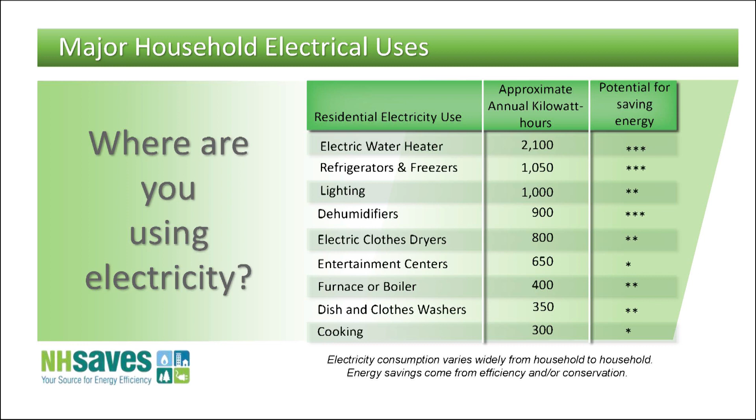We'll talk about a couple other things here, giving you an overview of major uses of electricity. We've cut down the number for lighting because so many people are using LED light bulbs now compared to incandescent, and they're even more energy saving than compact fluorescent, the squiggly ones. But if you've got those, continue to use them, and once they wear out, save them for a household hazardous waste day, which I assume you have in Peterborough and other towns. We can also bring our compact fluorescents to the recycling center.

If you're wondering how do I know how much these different devices are using - refrigerators are another good example that use a lot of electricity, but some refrigerators use a lot less than others. Do you folks know if the library here has watt meters available to check out? Don't know. Be a good prep activity just to find out.

Anything that plugs into a regular outlet - there's different brands out there. They're like $25 or $30. A number of years ago, like 15 years ago, every public library in the state got one or two of these, and a lot of libraries still have them. You check them out like a book, go around to different devices, plug it in, maybe leave it in for a day or so, and find out over the course of a day how much that refrigerator is using, for example, then do a little math to get that equivalent in kilowatt hours for the whole year.

That's what you're billed in, a kilowatt hour - that's 1,000 watts of electricity on for an hour. So if you had a light bulb and it's not on, it's not using any electricity. There's a time aspect with electrical consumption. 1,000 watts for an hour is a kilowatt hour.

Around here it's about 20 cents if you include all the costs. You folks have community power now, right? So you have to include the cost of keeping the lines up as well as the supply cost. But if you add that all together, it's about 20 to 25 cents now altogether. Anybody know, for a kilowatt hour? Still a pretty good deal, but our rates are some of the highest in the country. Probably if you think about all the effort that's gone into these storms and restoring power, there's just a lot of costs right there, just keeping these lines functional around here.

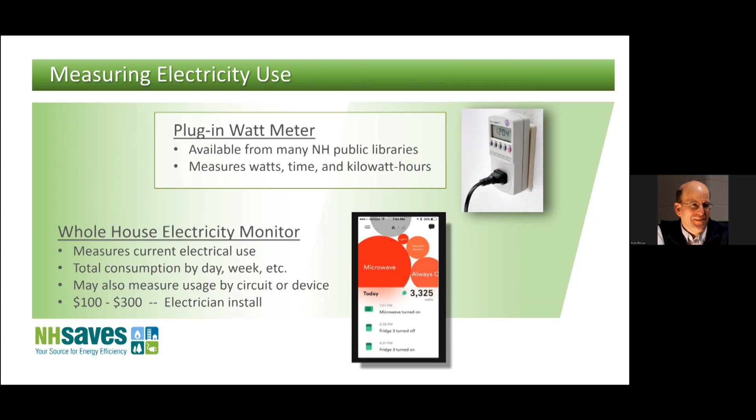If you're really interested in monitoring electricity throughout your whole house, you could invest in a whole house energy monitor. I've got one with my house, and it's telling me right now I'm using about 170 watts, which isn't too bad. But it also shows the amount of consumption over a period of time, and there's probably a microwave or stove that got turned on - you see the little spikes there for a short period of time.

What's pretty interesting, this is a Sense brand - even though it's monitoring just all the electricity being used by the house, it uses artificial intelligence to figure out the electrical signatures of specific big electricity consumers. So it tells me exactly how much electricity I'm using when I'm charging my car, I have a plug-in hybrid, or my boiler circulator pump, or the clothes washer. It's pretty neat - it certainly doesn't capture everything, but it's got a pretty decent list of devices that I can know specifically when they're on, when they're off, how much electricity they're using, by the month, year, or day. There are other devices like that as well that are pretty nifty.

Are there any AIs that just turn everything off when it needs to? Well, there's certainly the whole smart home technology thing, and there are some that do that.

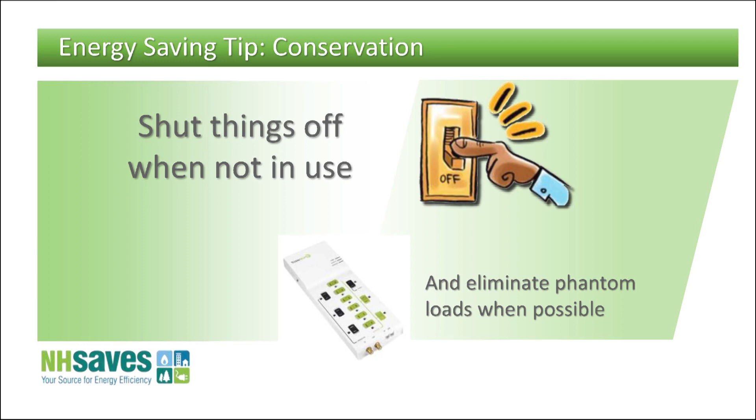There are even things like GFCI outlets that have a little light. They're using electricity, but it's not like you want to turn off that circuit breaker for it. So it's a little bit of a challenge, but I think that's kind of getting the inner energy geek coming out of you, going around the house and saying, alright, where is all this electricity getting used? Certainly that plug-in watt meter is a good way to start.

Next slide. Just a question: if you have light bulbs plugged in, does it use a phantom load? For the most part, if it's just a standard electric light, whether incandescent, LED, or fluorescent, it's not really going to be using any electricity. If it's a smart light, it may be using electricity. And there are some systems with ballasts and other more commercial type systems that might be using some electricity.

Good question. So we're just kind of talking about lighting. That light bulb we passed around, if you left it on 24 hours a day for a whole month, it would cost $1.34. That's at 20 cents a kilowatt hour, your local rate. So it's not that expensive - 21 cents, not 19, thank you.

I remember doing button-ups where it's like, yeah, one of these days we're going to have LED lights, it's going to be great. Well, we're already there. What's happened is these LED lights have become very inexpensive, but they're not quite as long lasting as the ones that came out 5-8 years ago, which were more expensive but a little longer lasting. Those used to be very heavy, but these ones now just look like a regular old incandescent light bulb.

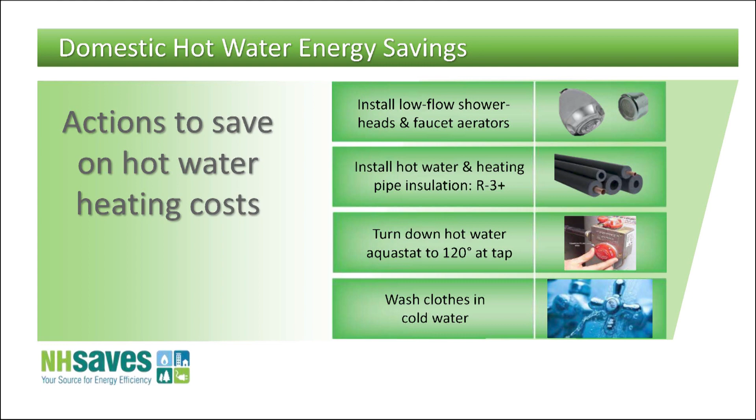Question: is there any downside to not washing clothes in hot water? Well, some people say that. I think for the most part pretty much all the detergents now are designed to work in cold water pretty well. It could be for things like bright whites—you might be able to get things a little whiter—but I think for the most part clothes washers and detergents are designed for it. And some clothes washers have a setting that's not absolute cold but sort of cold, so they mix in a little hot water, so it's not like 40-degree water that your clothes are getting washed in.

Already mentioned dehumidifiers, and that's where getting that setting so it's not on too much but on enough matters. I noticed in a lot of basements there's big differences in dryness, but in our basement, which is relatively dry, we have a dehumidifier. I oftentimes wait until June or thereabouts before I turn it on, and then maybe sometime in September, early October, would be when I'd turn it off.

Right now, this might not make a lot of sense for a lot of you, but the dew point, which is a better measure of humidity in the air—I just checked the other day, it was 29 degrees for the dew point, in other words this air is quite dry, and that's the key thing. Last summer, we didn't get below like 60 degrees for a dew point for months. We just remember that rainy, wet summer, and that's where a dehumidifier comes in handy to make sure you don't get to mold growth conditions and things like that in the basement.

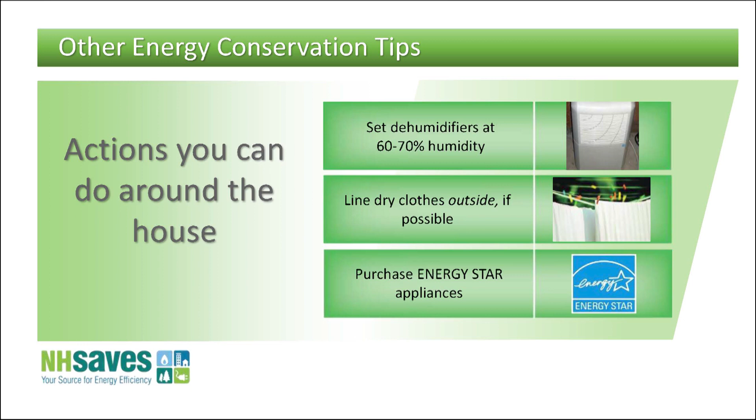There's essentially heat pump style clothes dryers. What's interesting about those is that you can actually install them in a place where you don't have to vent the air to the outside. So they give you a lot more flexibility, but they're also a lot more expensive. But they're also much more efficient than your standard electric clothes dryer.

Refrigerators, it's a good one. If you've got an old refrigerator, you certainly want to look up its rating, not only whether it's Energy Star, but how many kilowatt hours a year it's rated for. And then there's a nice feature with the program New Hampshire Saves has, where if you have a second refrigerator or freezer that's still functional but you don't really need any longer, they'll haul it away and give you $75. It's like my electric company giving me $75 to use less electricity.

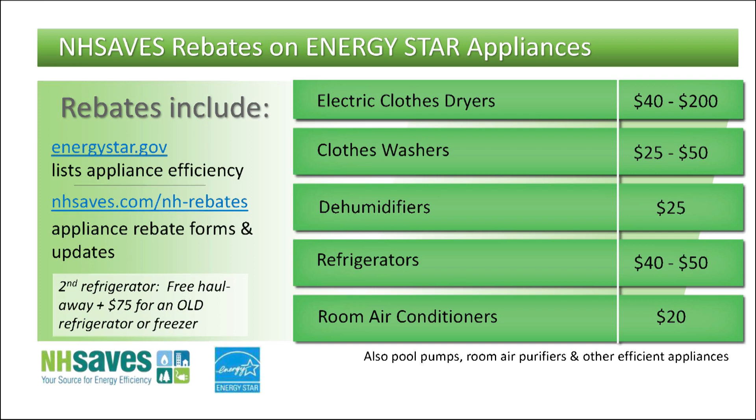All right, next slide.

So kind of moving away from electricity savings and domestic hot water, and more towards keeping your home warm in the winter and cool in the summer. This is kind of a weird time of year to be talking about all that, but we do live in a climate where really our biggest energy expense for our homes is heating them. So even this time of year, it's good to be thinking about that.

And I think if you click it again, something else might show up. So this isn't about freezing in the dark, although I applaud people who keep their thermostats low and things like that.

Next slide. Some quick tips along these lines: turning down the thermostat, maybe using a smart thermostat, which actually has occupancy sensors so it can help turn down that thermostat automatically for you if that works, or a programmable thermostat.

This definitely isn't the time of year to be talking about this, but in the fall, say October and November, if you have window air conditioners in your standard windows, it's very difficult to get that window with the air conditioner fully sealed. So really the best way, even though it's a pain, is to take the air conditioner out and fully close the window.

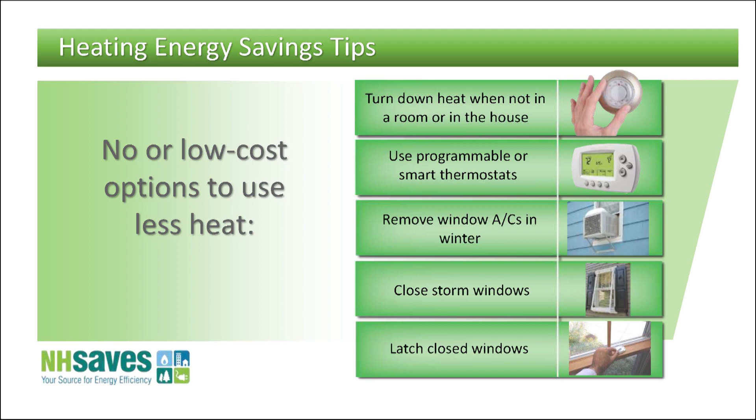So just kind of going through the house in November and checking all those things makes a lot of sense.

Okay, and then we go into a little bit more depth with this in the full button-up slide, and a lot more depth with building science principles and building analysts, but a little bit about conductive and convective heat loss. The idea is that in the wintertime, you've got a warm house and it's cold outside, and you want to keep that warmth in. So I'm going to talk about how we keep that warmth in, and what mechanisms are trying to have that heat escape. It's not all about the arrows - heat's not just escaping out of the top of the house, it's really escaping all the way around.

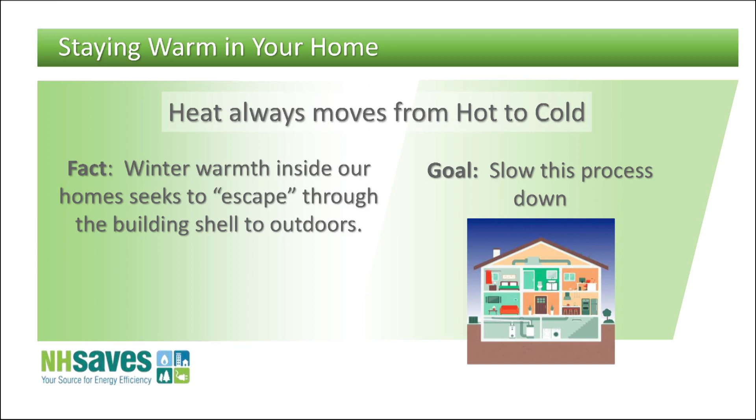Okay, now next slide. So just real briefly, conduction is one mechanism for heat transfer, or heat loss in the wintertime, and that's through materials. Then conduction - that's the one we tend to understand pretty well because you counteract that with insulation. Actually, the one we don't understand very well is the convection part, and that's basically heat loss from air leakage. There are a number of houses around here, I'd be safe to say, that are losing more heat from air leakage than they're losing from lack of insulation. People say, oh, I've got my house all insulated, I'm all good now. My next question would be, so you've done a blower door test to measure air leakage? And they're like, blower door test, what's that? It's like, okay, well maybe you should go to a button-up presentation.

And then radiation - it's not 3 Mile Island or Seabrook. It's more basically, today is a good example - it's the sun radiating heat. We appreciate it on a day like today. It was probably frosty here this morning, or 29-degree dew point, maybe not even frosty, but below freezing. This is an important one in the summertime - if you can reduce the sun's heat from hitting the house, coming in windows, or even just hitting materials on the house, you'll help keep that house cooler. So it's like shade trees or curtains or things like that. But I'm not going to talk as much about that, more on conduction and convection. So next slide.

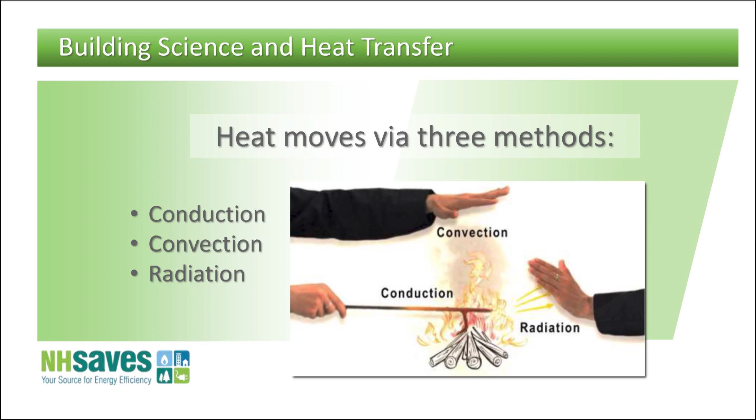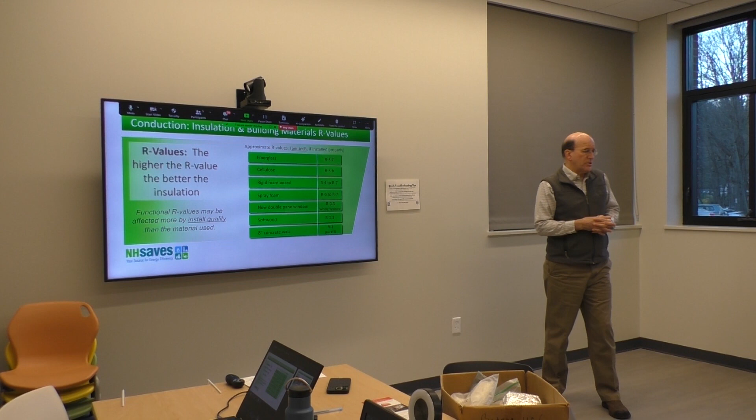So on the conduction side of things, we use different types of materials as insulating materials. This is a foam board, extruded polystyrene, and it has an R value, which is the measure of insulation effectiveness, an R value of 5 per inch. And then there's other materials.

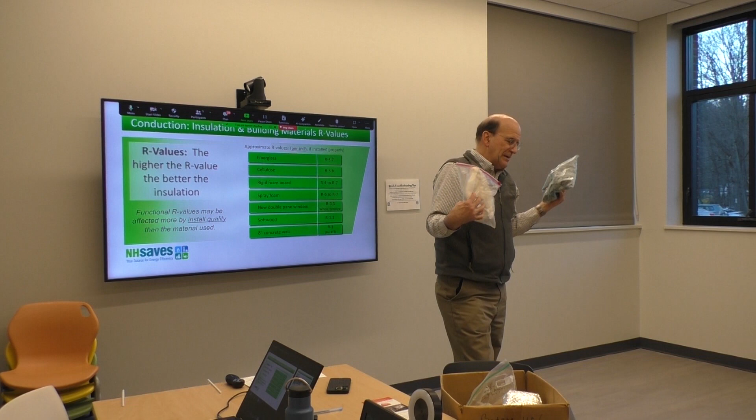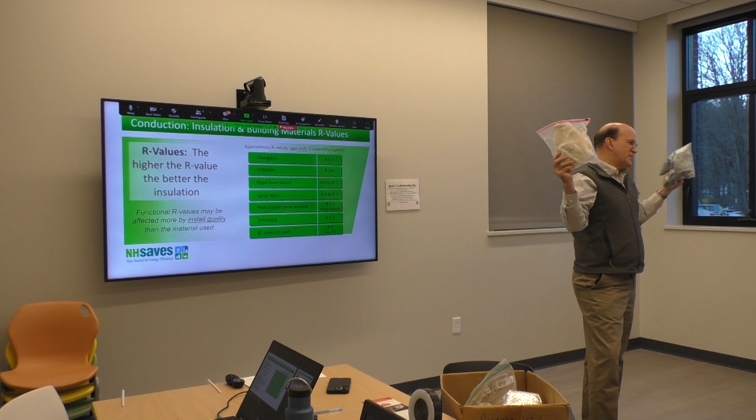This was in that NPR thing where I talked about little air pockets - it was like a 2-second thing. But it is an important concept, and that is that there are materials like cellulose, which is basically ground up newsprint, and materials like fiberglass, which is just this mat of spun fibers, where it's not the materials themselves that are insulating, it's the little air pockets that they trap that is insulating. Even with that foam board, it's the little bubbles that are trapped.

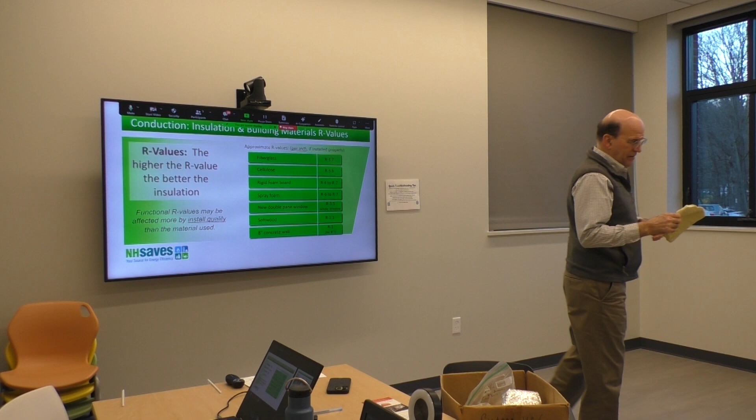And then there are some materials, like a high density closed cell spray foam, where the bubbles actually are gases that are more insulating than air, so they have a higher R value than some other types of materials. I'm not going to go through all these things, but it gives you an idea of the different R values per inch for most of these.

But I do want to point out a couple here - what kind of windows do we have here? Double pane? Double pane, probably pretty high performance windows. And then we've got a pretty thick wall. Anybody know what kind of insulation's in the wall? Probably this wall is R20 or something like that. This window right next to this wall is about R3, R3.5. So windows are great in terms of daylight - they can bring a little bit of solar heat gain in the wintertime, but they're thermal weak links when it comes to the building assembly.

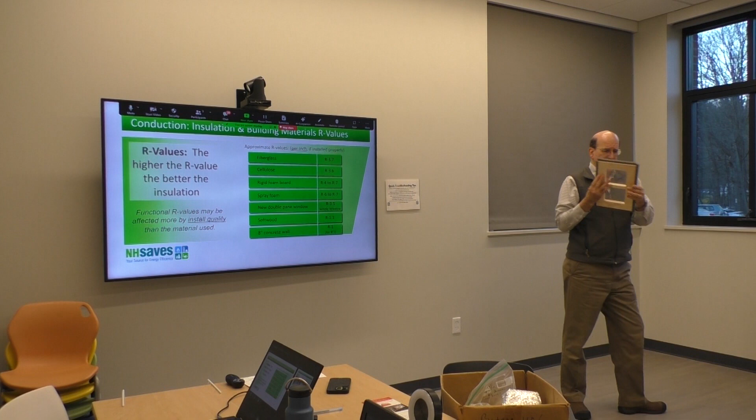Thermal pane is a little bit of a misnomer for insulating windows, but that's a good window. A single pane window is about R1, which loses a lot of heat. That's one of the things the window dressers program addresses, because now you've got two layers trapping some air in between, adding thickness as another layer, bringing you to roughly about R2 or R3 added to that window.

So even if you have a new house with these new thermal pane windows and think you really don't need window dressers, you're still going to get quite a bit of benefit with something like this.

Now notice this one, and this is the same for bricks or stone. If you have an old stone foundation and think, well, I don't heat the basement, it's not a big deal, you're still losing a lot of heat even in that 50-degree basement, because 8 inches of concrete or stone is a little over R1. So it's very low in terms of R value. It has a lot of thermal mass, M-A-S-S, which tends to mask the fact that it's actually very conductive in terms of heat.

One of the most effective things that can be done around here in terms of insulation is actually insulating basement walls, because your basement is thermally connected to the rest of the house even if you don't live down there or officially heat it. It also helps with things like frozen pipes.

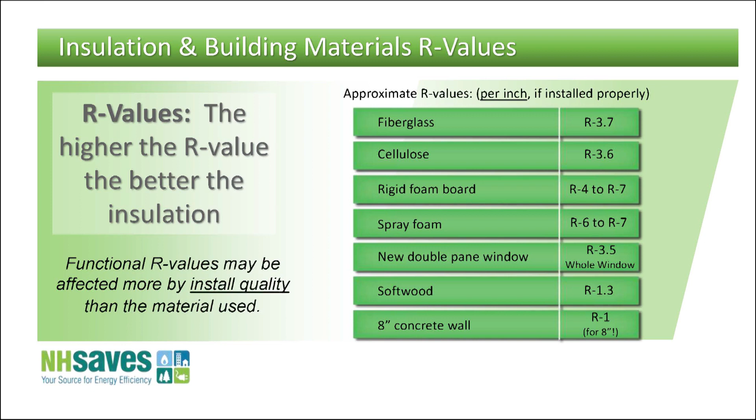We did that—that was one of the first things my husband did. Did it make a difference? Yeah, absolutely.

All right, next slide. Any other questions about insulating materials? I've got others that I can pass around, but those are some of the major ones.

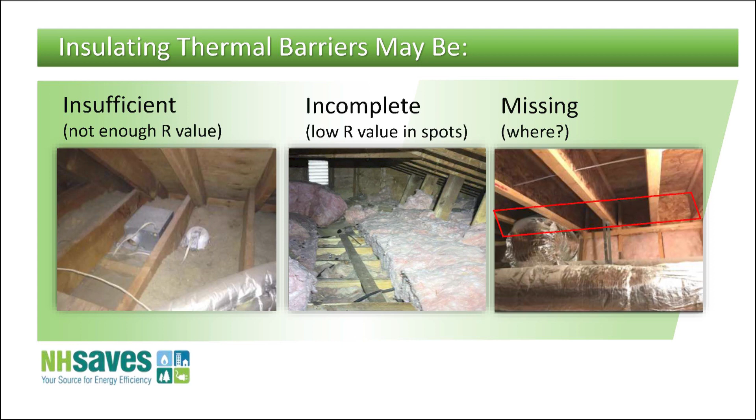Anybody notice what's going on here? Yeah, they didn't get it done. This is a vertical wall, and they did put fiberglass insulation in this portion of the wall, but they just missed this other portion. That's more common than you might think.

So can I get a volunteer to come up? I've got something that's not tricky. I'm just going to put one hand on one square, another hand on another square—you're close by—and just tell me which one is colder and which one is warmer, if there's any difference. We'll pass these around.

They feel the same? This one feels a little colder. Bob, what do you think? This one's colder. So we've got these two discs, they look kind of similar, but when you pick them up you notice there's some difference.

Basically, you want your house to be like this and not like this, because they're essentially the same temperature, but one is much more thermally conductive than the other. One is made out of aluminum, and one is essentially like a foam board type material. So even though they're the same temperature, when you put your hand on the aluminum one, it's conducting heat from your fingers. It's that same concept as walking on a tile floor as opposed to a carpeted floor—chances are that carpeted floor and that tile floor are about the same floor temperature, it's just more heat conducting out of your bare feet on the tile floor.

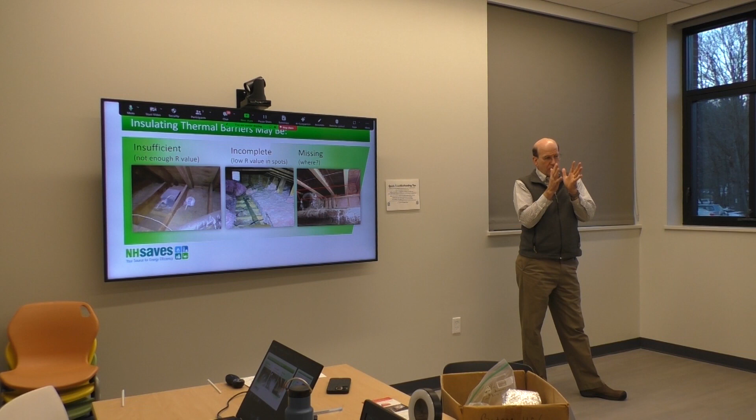It's true that manufactured homes and mobile homes are going to have thinner walls, but they also have bellies with ductwork underneath the home. The weatherization assistance program does a lot of work with mobile homes, and it's amazing how much better they can get mobile homes to be in terms of keeping that heat in.

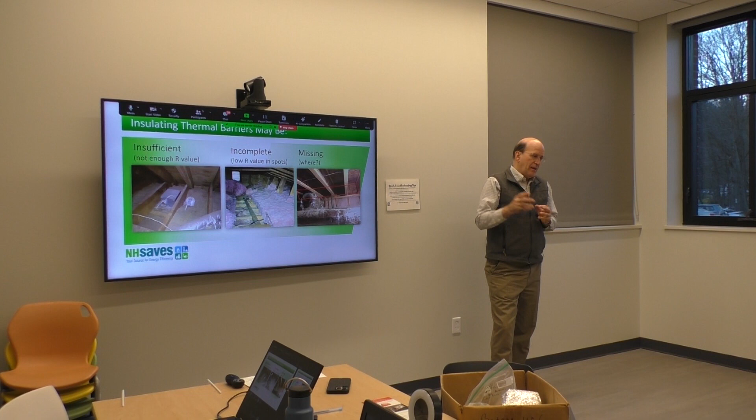They can use spray foam, but they don't use it a whole lot. They typically use blown in fiberglass because it's lighter weight than cellulose, and they fix the belly, and oftentimes add more insulation on top. It's a little bit harder for them to get more insulation in the walls themselves, but they can make a huge difference in a lot of them.

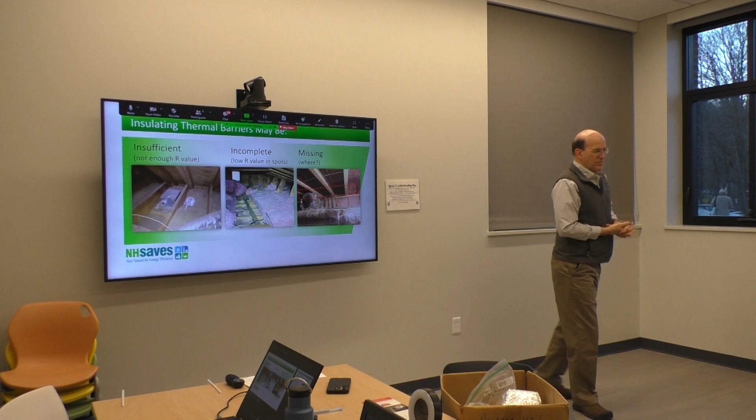All right, how about next slide?

We were just talking about conduction—basically think of it like squares of heat going through materials. Now we're talking about heat associated with air. The thing that a lot of people don't realize is that there's a lot of warm air leaking out of a house in a typical house in the wintertime.

If you can do a little bit of sleuthing—this is the kind of thing where volunteers could help a little bit—but without a blower door to measure that air leakage, it's really hard to tell how much of that warm air is leaking out in the wintertime. As a colleague says, that's expensive air. That's air you've paid dearly to heat, and it's just leaking out of the house.

We're basically talking about pressure differences, not about covering a surface like insulation. Sometimes I have a slide with an inflatable raft that's all deflated, and it's like: I'll sell you that inflatable raft for really cheap, $20. It's only got leaks in about 5% of its surface area. You want to buy that?

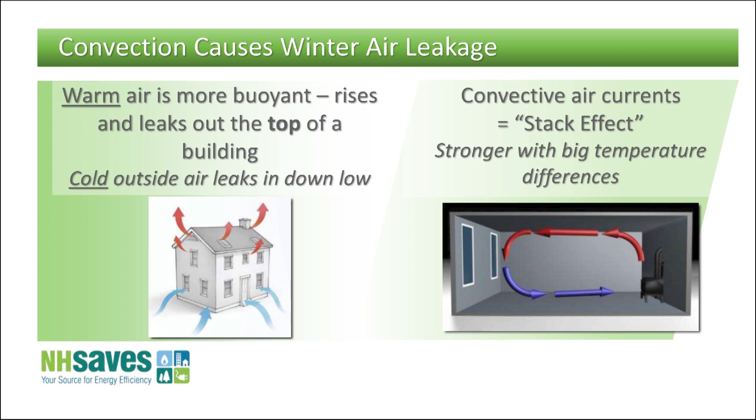So those are all examples of convection, but the one that's really important in terms of keeping houses warm is that air leakage convection, that warm air escaping out of the house. There's also another term for it called the stack effect, where essentially the taller the stack, the stronger that convective force. The colder it is outside, the stronger the force as well. So if you have a 3-story house and it's 0 degrees, that's going to be a much stronger force of air leakage than a ranch style house when it's only 50 degrees outside.

In terms of priorities, these arrows kind of do make sense: the highest priority is up in the attic, and the second highest priority is down in the basement. The center of the house is just not as much of a priority because there's not as many opportunities, and also those pressure differences between inside and outside aren't as great.

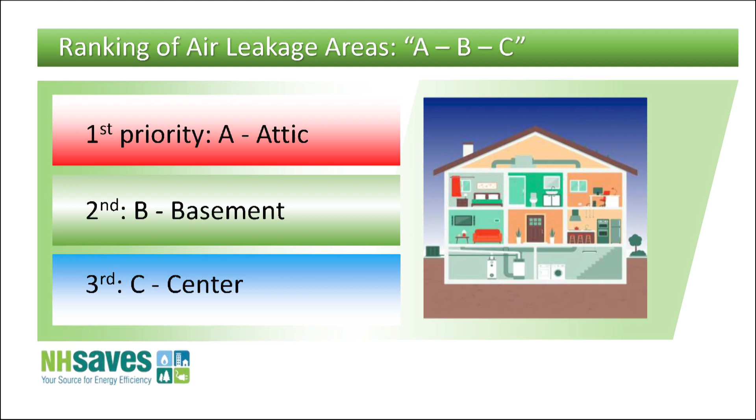What you're seeing here might be a little hard to see, but if you look closely, you'll notice that this insulation looks stained, and it is. We tend to call this blown-in fiberglass 'filter glass,' in the sense that the insulation itself is not stopping the air leakage. It is filtering out the dust in the air that leaks up through it.

Over the years, you can see it's a great way to sleuth your attic if you're willing to go up and get a mask and eye protection and things like that. Essentially, there's been air leaking out of this little hole over months and years, and that caused the insulation to get stained.

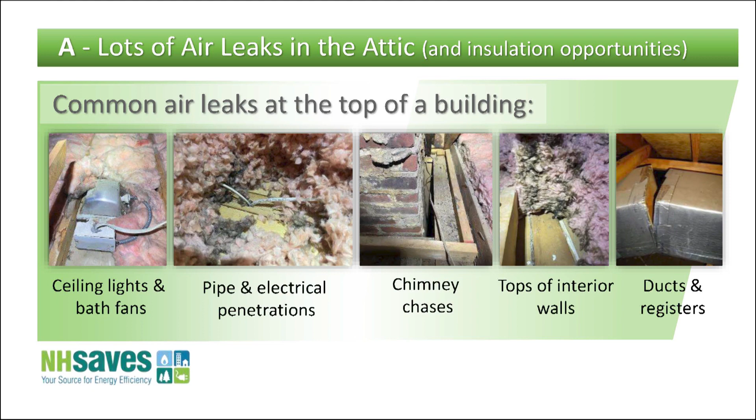This, in my opinion, is sort of like a chimney chase, with that opening there being like a superhighway for air leakage. A 2-inch gap, that's potentially a lot of air leakage. A lot of these things are where the interior wall inside the living part of the house meets that attic plane, so it's things you won't notice just being inside the house. You have to go up to the attic to see these sorts of things, like broken ducts and things like that. All right, next slide. So that's that A.

So, quiz question for you: a pegboard attic hatch with 16 inches of insulation. Is that a good assembly or not so good?

It's a trick question, it's a trick question. It's really good for air quality. Yeah, lots of fresh air.

Yes, can you have too much insulation? That's a good question. I mean, electricians might say you can have too much insulation if they have to crawl around in it. But it certainly reduces its effectiveness if you're adding insulation on top of an already well-insulated assembly. There's basically diminishing returns with insulation; it's not a linear relationship.

As Trish knows, I tell people it's good to think of these as two different nodes in your brain: the air sealing node and the insulation node. So in terms of the insulation node in your brain, 16 inches of fiberglass insulation, yeah, that sounds pretty good. But what about that other node in your brain that you might still be kind of developing?

You need all that insulation to make up for the holes. Yeah, but the problem is that even with all that insulation, it's filter glass—it's allowing air to go through that insulation. And as soon as you have air going through insulation, you don't have those little air pockets being trapped, so it actually reduces the effectiveness of the insulation. So not only do you have heat loss from air leakage, you also have heat loss from the insulation not working as well. Those are the two nodes of your brain: insulation, yeah, gotta have insulation, but you also gotta have good air sealing in the house.

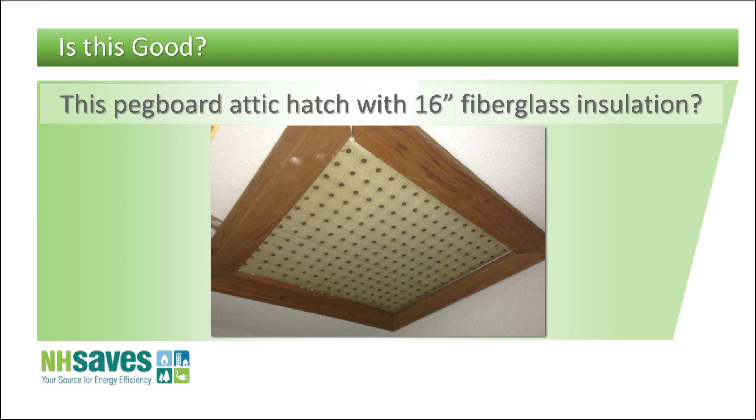All right, next slide.

So we were talking about the A part, now we're down to the basement, the B part. There's some good opportunities as well in the basement in terms of going after air leakage—any place where you can see daylight is going to give you an indication that there's probably some air leakage. It might be more common than you think. My adage is that the harder it is to get to spots in the house, the more likely those spots are going to need some work—like the far end of the crawl space that you can barely crawl into.

So we were talking about the foundation and frame part of the house. There's that kind of boundary, particularly right at the foundation junction between the wood and typically concrete, where you can have sort of a wavy boundary, so there can be a fair amount of air leakage all along the perimeter of the house. Next slide.

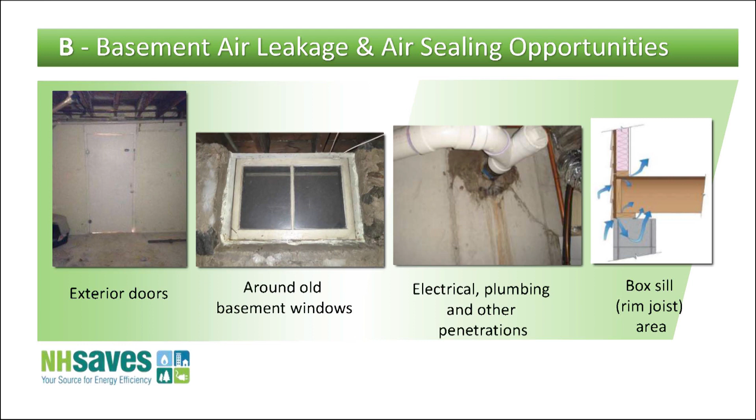And yes, fireplaces—who was it that mentioned you folks plugged up your fireplace? It's very subtle, you don't really notice it until you fix it. And then we really noticed there was not a breeze. It's kind of a subtle breeze, but you notice it after. So what's happening is that same stack effect, convection—the warm air is just leaking out, going up the chimney.

There are some situations where, with certain fireplaces, having a fire puts you at negative efficiency—more warm air goes up the chimney than heat you get from the fire. Even a decent fireplace might only be about 20% efficient. And then there's all that heat loss when you don't have a fire from an open flue. But if you have a good way to close that, it really helps fix the problem—there are some good retrofit flue dampers that can seal it quite well, though a lot of the built-in ones don't work very well.

My son had a damper put in recently, something I hadn't seen before—the damper cover is actually at the top of the chimney, with a chain to open it. So instead of having a shaft of cold air in the middle of your house, you've got something protected from the cold air, at least a little bit. Particularly if it's a straight shot chimney, that can work pretty well.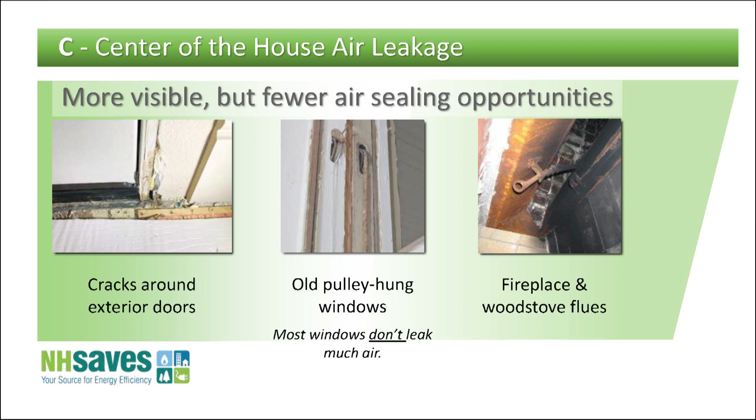This is where people, when I talk about air sealing, say well, I like fresh air and oxygen. But the thing is a lot of homes just leak a lot more air than they should. I'm sure with this building they've got it figured out about metering in the right amount of fresh air, but a lot of homes have too much fresh air—too much of a good thing. That's where you can compare your house with standards using a blower door test, which will measure how much air leakage there is in the house.

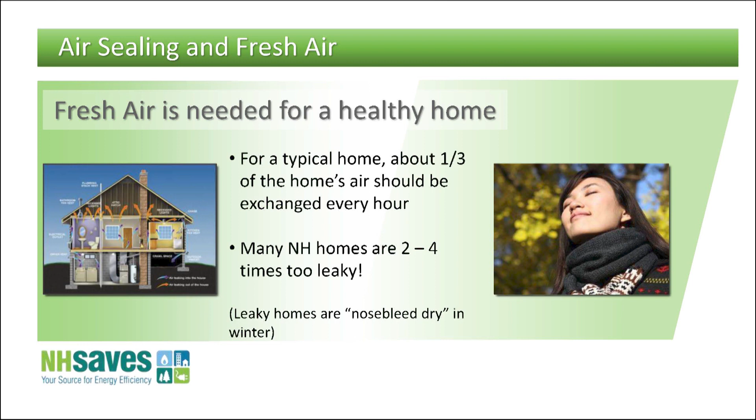So what we like to say is seal tight and mechanically ventilate right. In other words, that doesn't mean you shouldn't have bathroom fans or a kitchen fan to deal with odors and humidity. A lot of times with older houses, you're just fine with a bathroom fan. Some are actually designed to work at a low level to provide exhaust ventilation even when you're not in the bathroom, and a higher level when you need humidity removal.

There are more sophisticated devices called heat recovery ventilators and energy recovery ventilators. In many cases a house doesn't need it, but if you're building a brand new house, this essentially allows you to build it really, really tight, very well air sealed, and then meter in the right amount of fresh air. There's a heat exchanger that helps pre-warm the cold air coming in during wintertime, using the stale air that's getting exhausted out. That's kind of for the higher level, ultra energy efficient homes, but a lot of existing homes don't need that level.

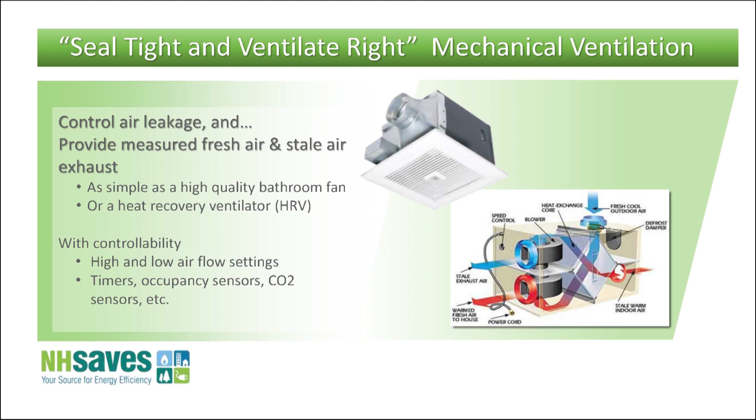But if you do have moisture issues, standing water any time of the year in your basement, it's certainly a major consideration. I always like to say the sign of a good energy auditor is that they pay attention to those sort of things. Because if you're making a home more air sealed and not changing the moisture dynamics, you could be kind of plugging up a lot of moisture. So it's important to understand all that. You're all kind of nodding your heads like you're imagining situations where that's happened, imagining the horrible effects.

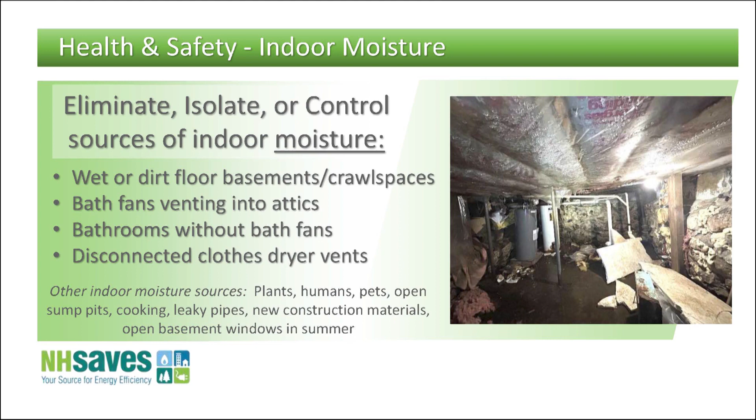Yeah, spray foam is a good example. Because it insulates and air seals, it can make a house much tighter than before. And if you have somebody coming in and doing spray foam without an energy audit and without understanding some of these dynamics, there's certainly some not-so-pleasant stories out there.

I like to tell people, if you have icicles that get longer than, say, about 2 feet, you should be paying attention to that. We've had some pretty mild winters, so some winters are more ice dam winters than others -- the last couple we've been pretty fortunate. But that's giving you a clue. It's actually good information for an energy auditor to find out where you're getting those icicles and how long they are.

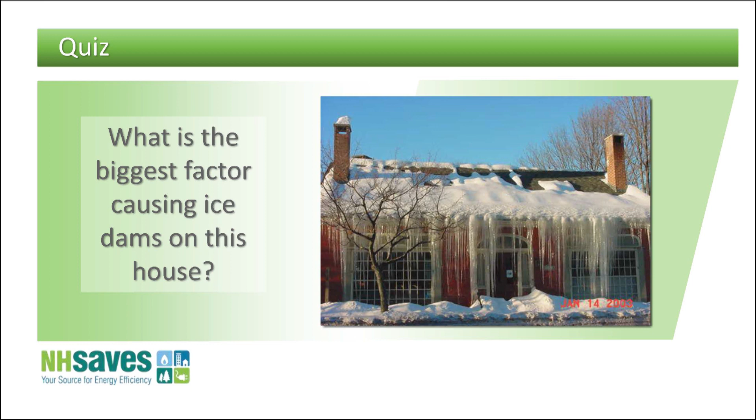In terms of the problems, first doing that air sealing and then adding, typically this blown-in insulation kind of covers things really well, and that can be very effective. 12 to 16 inches of insulation is pretty much what you would expect with that fibrous material, cellulose or fiberglass.

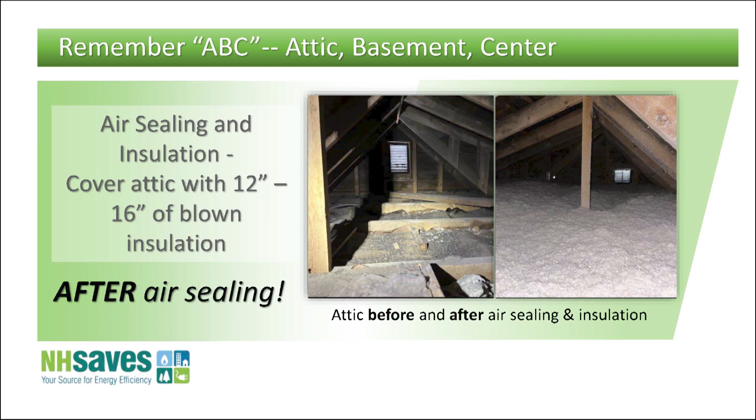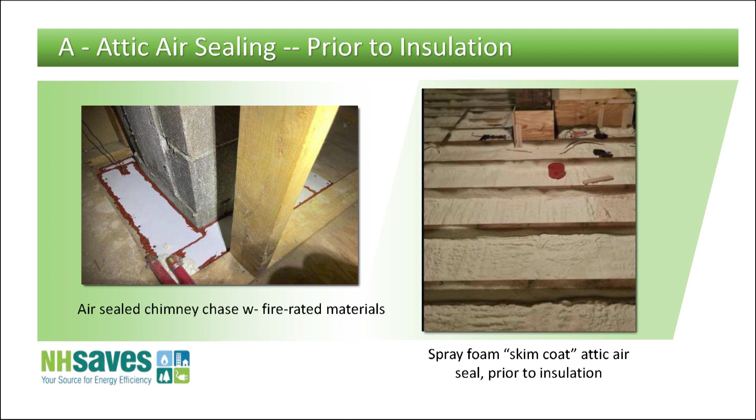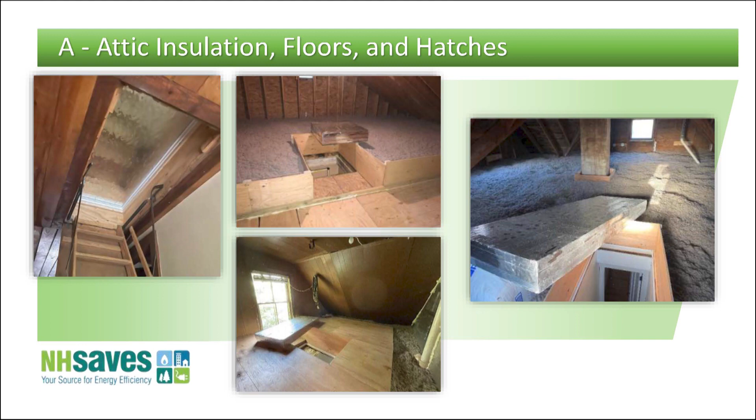In a basement, this is spray foam with a fire barrier cover. This is spray foam in walls before adding the drywall. And this is a material called Thermax—it's a brand, a particular type of foam board that is rated for exposure, at least in areas that aren't lived in. Most of these other foam boards are not rated for being left exposed, and you have to be careful about that from a fire risk perspective. When they burn, they produce a lot of nasty smoke. Not a good thing.

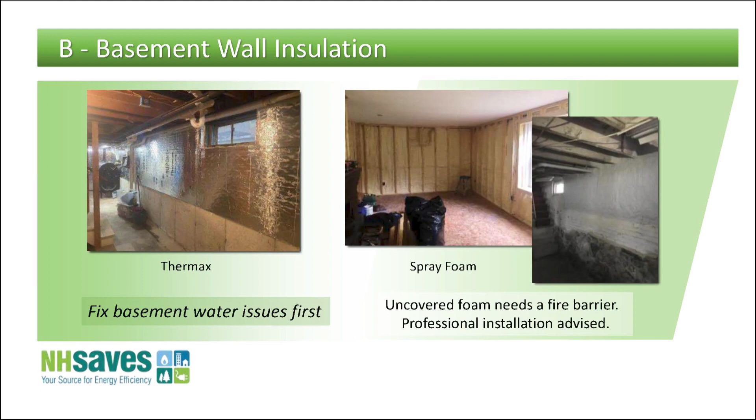In the middle of the house, this is one example of a kind of temporary chimney flue blocker, made out of thick felt type material. This is a weather strip that can be done around those exterior doors where you might see daylight. And it's kind of unusual to be able to see the chimney in the middle of the house, but this is air sealing around that chimney.

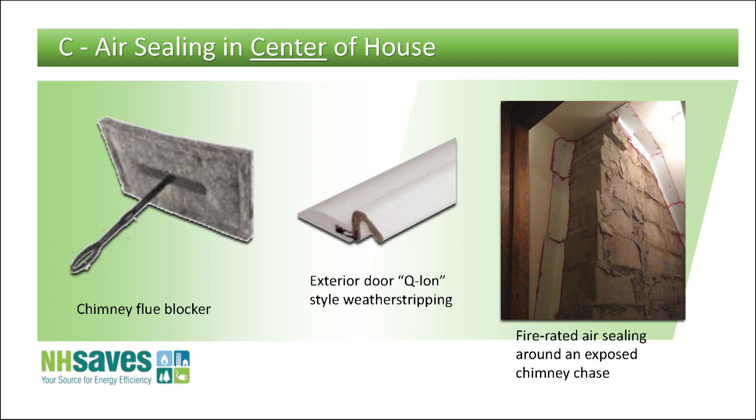If you have, say, an older house and it doesn't have much insulation in the walls, you can dense pack, typically cellulose or fiberglass, in those walls, and that will insulate it. It'll also help air seal, because there can actually be a fair amount of air movement in exterior walls from inside to outside.

And that's basically about twice the density of that loose blown cellulose that would be up in the attic.

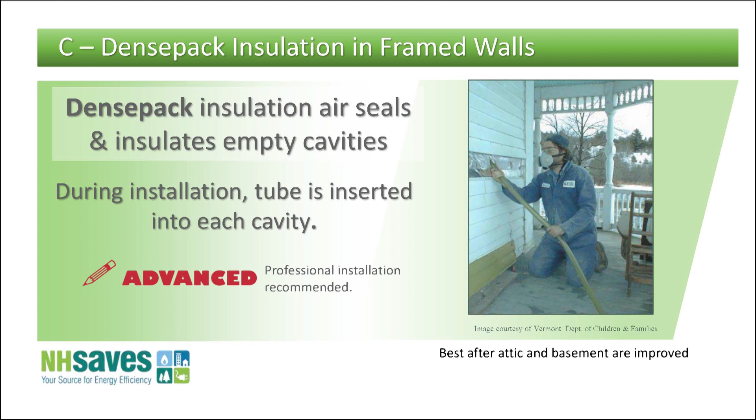So windows, we already talked about them a fair amount, but there's lots of reasons for replacing windows. In terms of cost effectiveness, for probably about half the cost of replacing all your windows in the house, you could get a really good weatherization job. It'd be even less with the incentives from PREP and from New Hampshire Saves. And you'll save a lot more energy from that weatherization job than from the window work. Now, you might want new windows for other reasons, but cost-effective energy savings isn't a really good justification for windows, even though a lot of window salespeople have convinced us otherwise.

Even with pretty old houses with pretty old windows? Yeah, there's a comfort factor as well if the old windows aren't functioning very well. But one thing people don't realize is when they replace old windows with newer windows that have the low E film, they'll get less solar gain in the wintertime because less sunlight is reaching the inside. So you're changing the dynamics of the house in many ways for good, but it could cost 500, 800, maybe more to replace one window, and that goes a long way towards weatherization type work.

We did some math on this a couple of years ago, sharpening our pencil for New Hampshire Saves programs, and looked at going from worst case single pane windows to the best case, like U 0.2 factor windows, which is R5. Even with the energy savings alone, I think it would have taken 20 to 25 years to pay for the cost of a window. It's a long payback period.

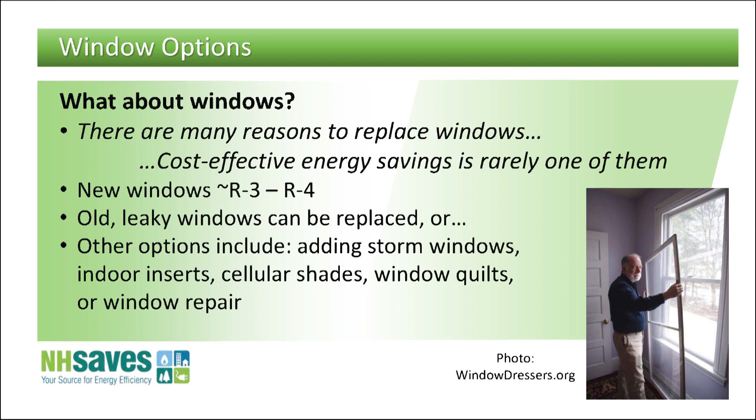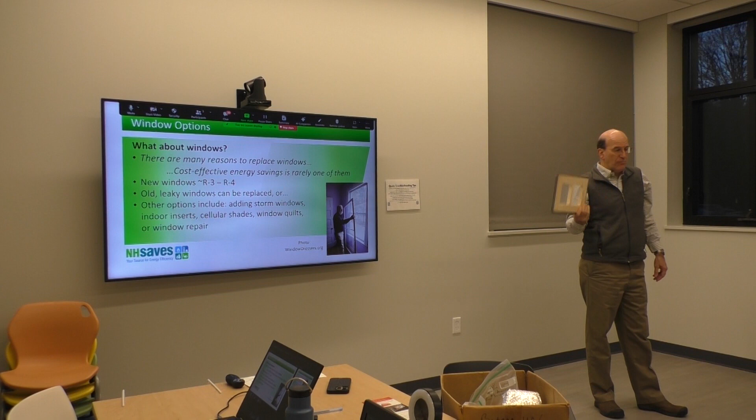The difference between those and WindowDressers is that this is volunteer labor. It's more of a community effort, and these average about $50 net cost. There's also building some for people who otherwise couldn't afford it. So it's more of that barn raising aspect.

All right, next slide. Just pretty quickly, it is really helpful getting that comprehensive energy audit, where they spend a couple hours at the house doing diagnostic tests, give you a report, and prioritize potential improvements. In some cases, they might do energy modeling where they can tell you this improvement will save this amount of energy. That's a bit higher level, but it can be done.

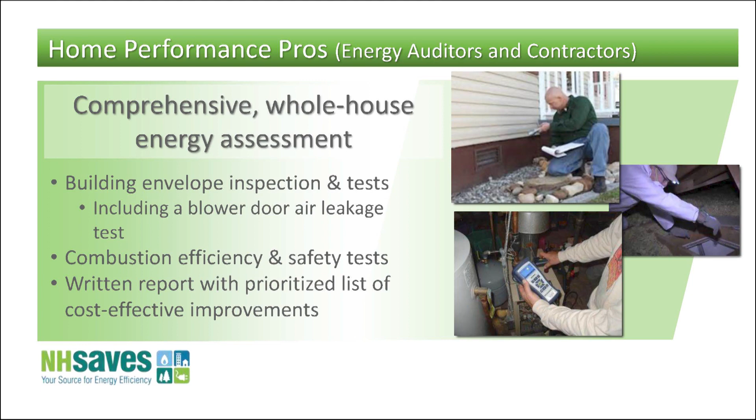Next slide. So this is what a blower door is. It's basically a big exhaust fan that goes into a portable frame, and it depressurizes the house to a certain level, negative 50 pascals. The number you get from it is CFM 50, cubic feet per minute of air blowing through that fan at that 50 pascal standard pressure difference. So you can do an apples to apples comparison of different houses. You have to also take into account the volume of the house, but it's relatively easy to do.

It's also used by weatherization installers to do what's called blower door guided air sealing. They'll use it to figure out where they need to target their efforts.

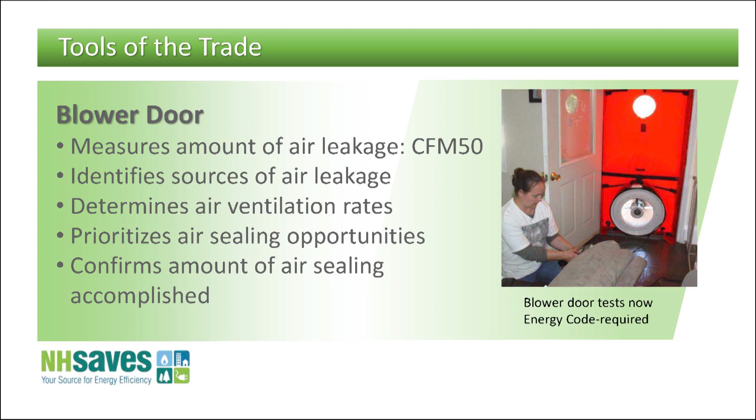How expensive are blower door tests? If it was done alone, like say a builder wanted a blower door test for a house, it might be like $200 to $250. If it was part of an energy audit that would be more comprehensive, probably more like $500 or so. And then they might do other tests as well.

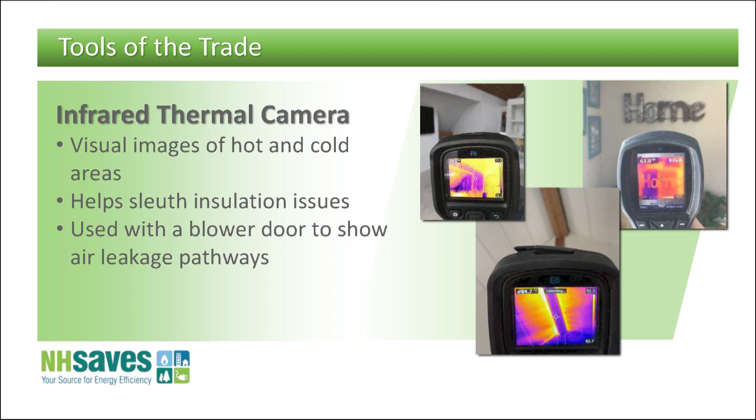So they might use an infrared camera. What you're seeing here is this wall that's uninsulated showing up as purple. This one cavity is less insulated than the other, so it's more purple. This is with a blower door going. You can combine the two and learn about things like whether there's air leakage in the walls. The nice thing is that it takes a fair amount of money just for somebody to come out and set up a test, but if they're going to be there, they might as well do the whole energy audit and things like this as well.

And we'll talk a little bit about more efficient energy replacements. But next slide.

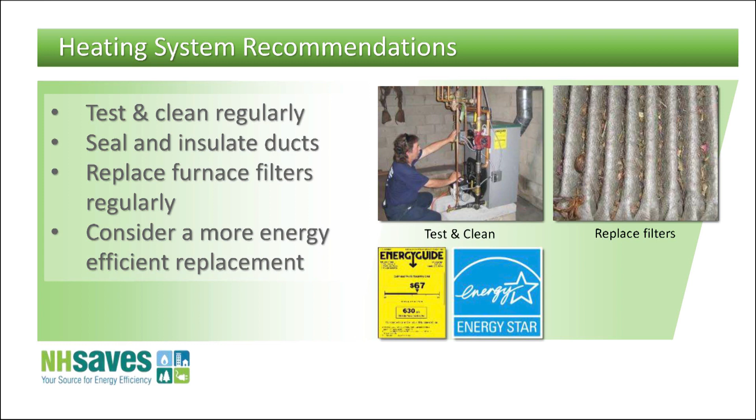So one thing to think about in the big picture, we talked about windows versus weatherization. A lot of times there's this fixation on equipment, like, okay, I need to get a more efficient heating system, that's going to make my house more efficient. Well, it's sort of like saying I need to get a more efficient bucket, and I'm not really paying attention to the features of this bucket.

So really, in my opinion, focus on that leaky bucket first, and then you can move to, you won't need as big a heating system, you won't need as big a solar array either. So reduce then produce is another way to think about it. Or go after the envelope and then go after the heating system.

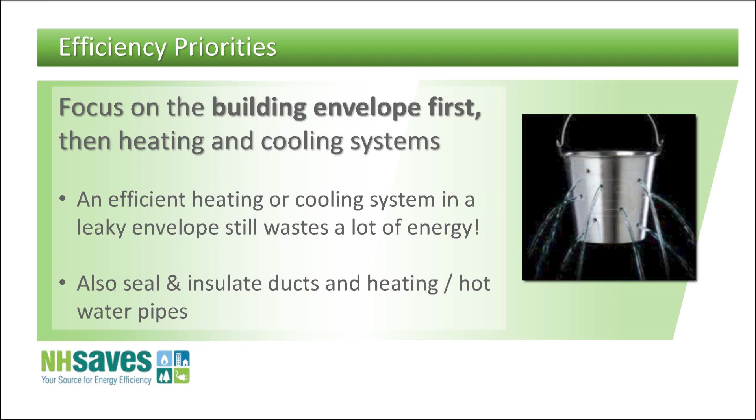Next slide. So in terms of the programs that are out there from New Hampshire Saves, it's all 4 utilities getting together, so it's pretty consistent amongst the utilities. There's a few differences, I'm not going to go into detail about a lot of these, but there are rebates available for things like heat pumps, and there's those rebates that you saw for Energy Star appliances. The one that I'm going to emphasize is the Home Energy Performance Program.

Next slide. So for lots of different devices, there are both incentives available from New Hampshire Saves, and IRA stands for the Inflation Reduction Act. I'm not sure people realize that you can get a 30% tax credit for a new energy efficient wood stove or pellet stove, and that includes the installation cost. Nice feature.

There's also incentives both from New Hampshire Saves and the IRA for that heat pump hot water heater that we were talking about. So going to NHSaves.com helps to see all the different appliance rebates and other incentives that are out there. Next slide.

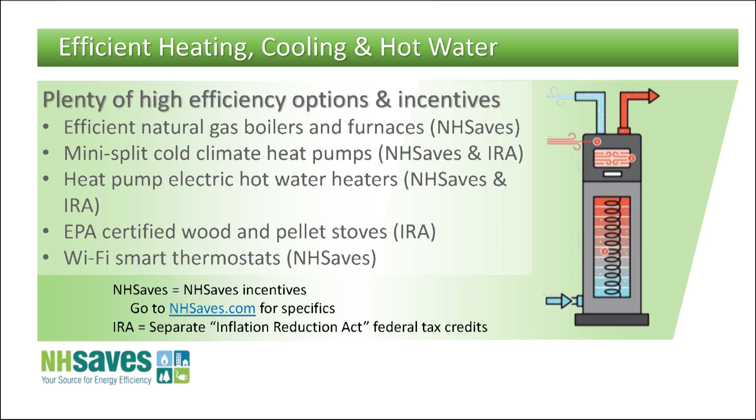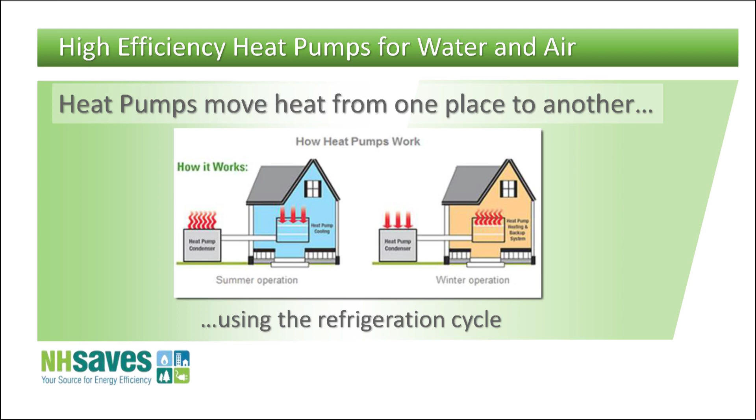And just real quickly, a heat pump is a little different than another type of heater in that it uses the refrigeration cycle to essentially move heat. It concentrates heat on a cold day and moves it inside, and it does the same thing in the summertime by moving heat from a warm house outside to cool it. So it's essentially just that refrigeration cycle working in reverse, winter versus the summertime. Next slide.

It's not a huge incentive that New Hampshire Saves offers for these cold climate mini split heat pumps, but it's a decent amount. And then some of these probably aren't as relevant, but there's a nice incentive for those heat pump hot water heaters in addition to the tax credit, which is a 30% tax credit. So it kind of adds up.

And then if you do get heat pumps, you can get incentives for smart thermostats as well. And if you're participating in that home energy performance program that I'm going to mention in just a second, you can also get, I think Eversource has 0 interest financing for getting these other efficient heating and cooling equipment. That's good to know. All right, next slide.

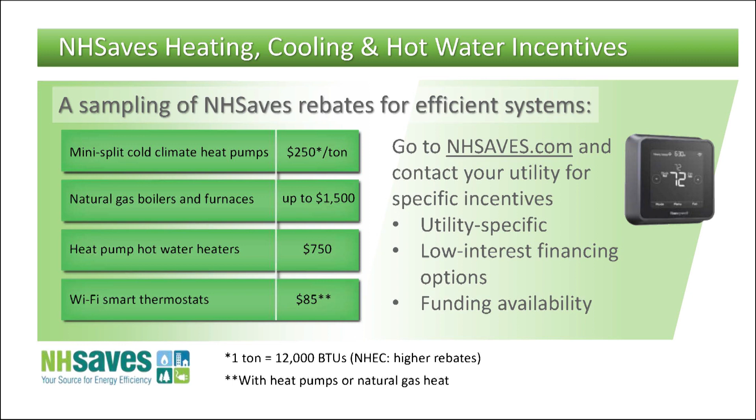Question about the smart thermostats: do we have to have a heat pump to get that? There used to be a program where you could, but that's no longer the case for the standalone incentive. What if you have oil or propane heat, are there any incentives? There are smart thermostats in the HEP program that work with fossil fuel heating systems—that's part of the program, and that's one of those we pay 100% of. So yes, that would work even with an oil system, not just with a heat pump. I don't think there's a standalone incentive on those though.

Okay, the gas incentive - if the electric utilities do that too? No, the electric utilities don't.

I just also wanted to mention that in the IRA there are rebate programs. I've got a couple of slides on this - we're getting a little after 8, so we'll have to see whether we want to cover that or not. They're in the PDF of the slides.

Let's go through this - this is the most important one of the things I'm talking about for you folks with existing homes. It's called Home Energy Performance. If you qualify, and I'll show you how, you get a $500 energy audit for $100 up front, but that $100 becomes a credit towards any work that's done. This is the program where NH Saves Utility will pay for 75% of the eligible weatherization work, up to a total contribution of $6,000, and they provide 0% interest financing for your contribution. So it's a pretty nice program.

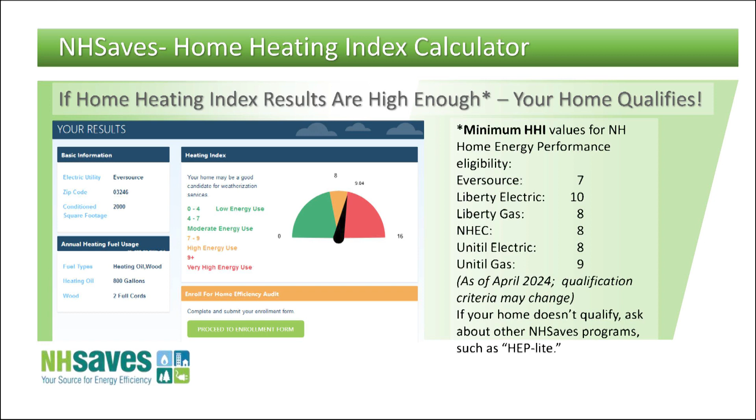All right, next slide. So that's definitely the case if you've got a home where you're thinking some of this stuff might be good at our house. Getting that energy audit is only $100 up front, and then you don't have to do all the things that they recommend. There might be some things that need to be done, but it's a great program.

This might be a little hard to read, but this is an example of a home from a couple years ago - over $10,000 of work. It maxed out that $6,000 contribution. The air sealing they paid for 100%. They paid about $4,000 and got a lot of weatherization work for that.

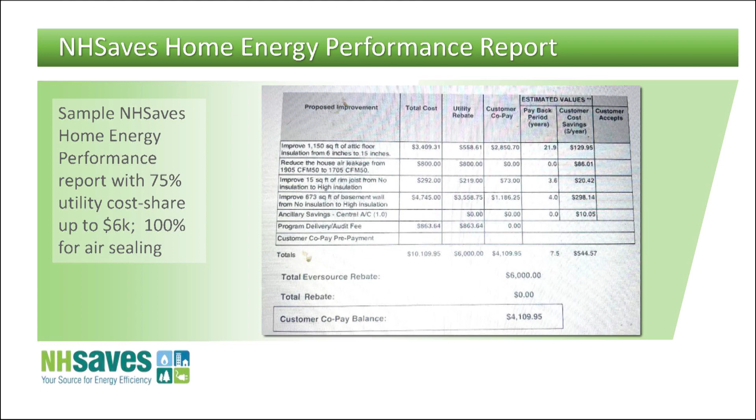All right, so we've got a little decision point here. Lots of good questions, so even with this abbreviated presentation, it still went a little longer than I was expecting. But next slide - I've got 3 slides about the Inflation Reduction Act and the tax credits and rebates that are coming up. Do y'all still want to bend your ear for a little bit longer? And we started a bit late too because of technical difficulties.

Yes, that was a factor too. Okay, so if you're feeling okay, I'm ready to keep on going for a couple more slides here.

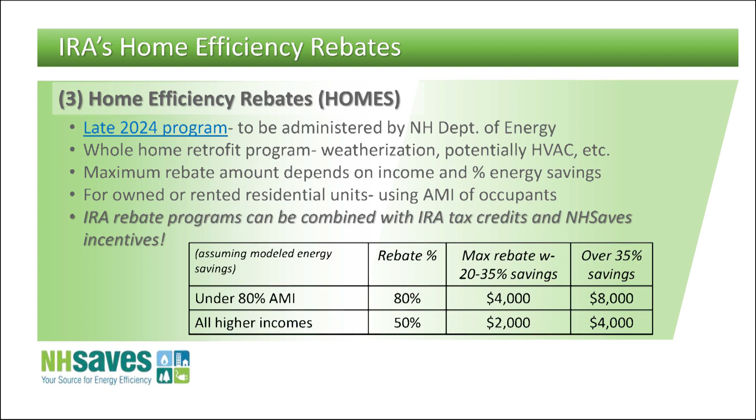So, and that's pretty much it, I think. What's the next slide? Yeah, that's a summary, and next slide is my contact information.

Oh, no, this is a slide about how to get a hold of slides from PAREI, and then here's my contact information. So I both do consulting as well as work with Lakes Region Community College. I don't do energy audits or get specifically involved with these programs, so I'm kind of vendor neutral in terms of the folks to work with or whatever.